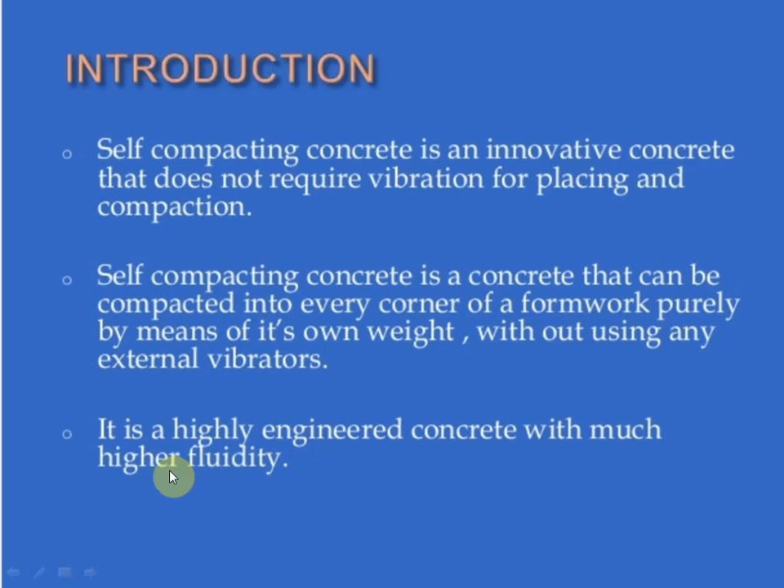It is a highly engineered concrete with much higher fluidity. The fluidity is more in this, that's why it will reach each and every corner of formwork, and it will get compacted by itself by its own weight. So that is the main thing, because of the higher fluidity.

Next, materials required for self-compacting concrete are cement, fine aggregate, coarse aggregate, water, chemical admixture. The main ingredient which gives the self-compacting property is VMA. Plasticizers, and VMA is nothing but viscosity modifying agent, and air entraining agents. So viscosity modifying agents, called VMA, and air entraining agents, that is AEA. These are the main ingredients for the self-compacting property.

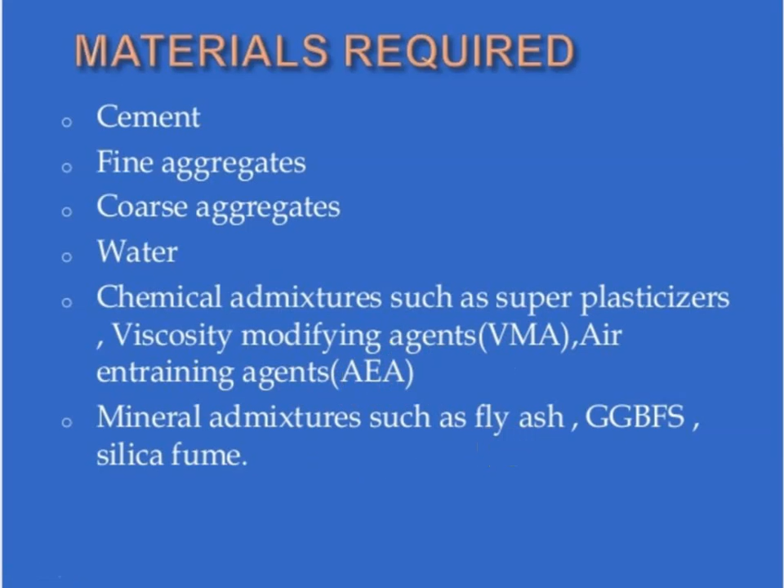Mineral admixtures are also used, like fly ash, GGBFS, and silica fume. GGBS is nothing but ground granulated blast furnace slag. For cement you can use 43 or 53 grade, and well graded cubical or rounded aggregates can be used. Water quality is maintained the same as reinforced concrete, that is potable water should be used.

Chemical admixtures, like I have told, superplasticizers, particularly polycarboxylate ethers, are used in SCC; VMA and AEA are also used. For mineral admixtures you can go for fly ash, which improves the quality and durability of concrete. GGBFS, also called GGBS, ground granulated blast furnace slag, will improve the rheological property of concrete, that is the semi-solid and liquid state. And silica fume will improve the mechanical property of concrete.

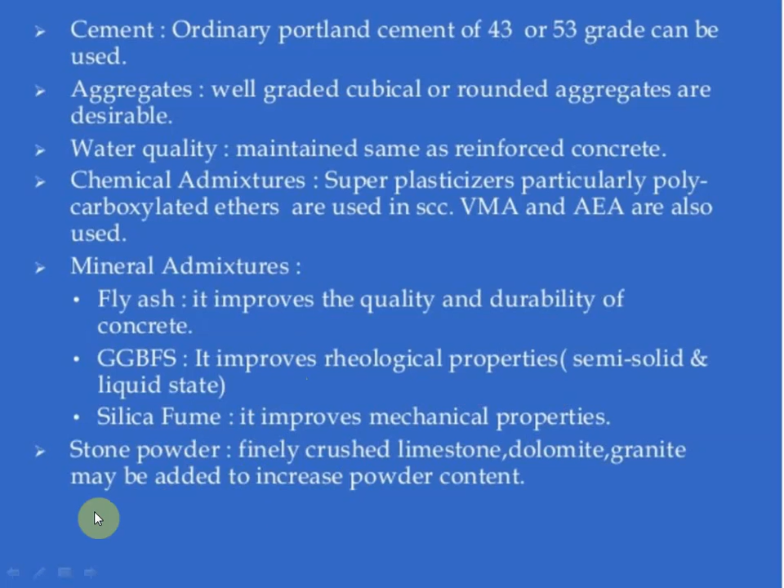Even stone powder is used in this concrete, that is finely crushed limestone. Dolomite, granite may be added to increase the powder content. As compared to normal concrete, SCC has more water content. In normal concrete the water percent is 18%, here it is 20%. One more thing, coarse aggregate in normal concrete is 46%, but in SCC it is 28%. That is, coarse aggregate is used much less as compared to normal concrete.

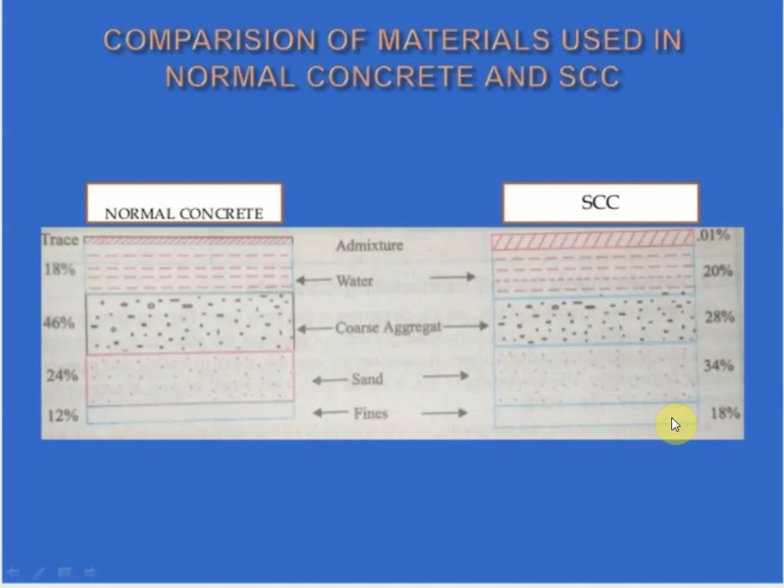In normal concrete sand is 24%, whereas in SCC sand is 34%. Here more sand is used to get that fluidity, so the paste is more in SCC. Fines are 12% in normal concrete and 18% in SCC. So, properties of SCC, that is self-compacting concrete.

In the fresh state, it has very good filling ability. As I told, it flows easily at a certain speed, by its own weight, into the formwork. That's why it doesn't need any vibrators. And passing ability: it passes through reinforcement, such as in slabs, easily without blocking.

Segregation resistance is one of the best properties of SCC, because one more quality of SCC is fluidity, and with fluidity there are chances of segregation, but it is a segregation resistant concrete. The distribution of aggregate particles remains homogeneous in both vertical and horizontal directions, because when you add more water there are chances of segregation. But here the particles remain a homogeneous material in both directions, whether in columns, beams or slabs.

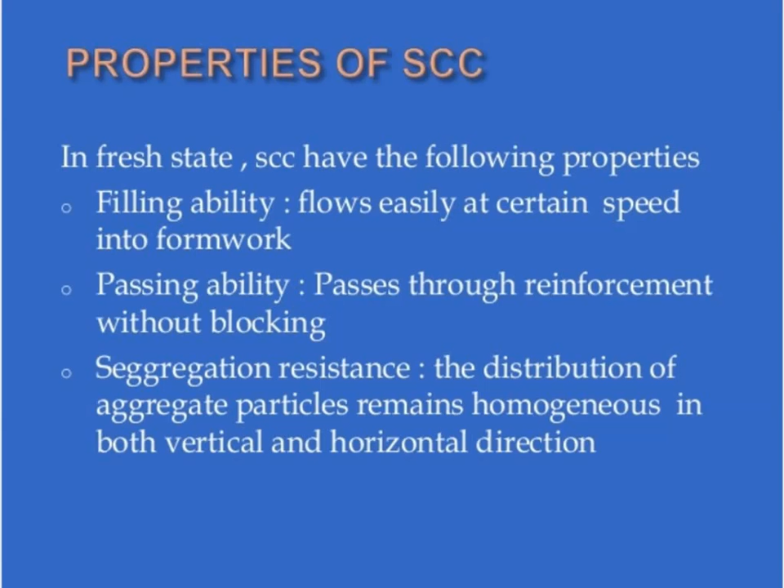Production and placing of SCC. The material proportions used for this concrete are taken by volume rather than by mass. Mixing should be done for a longer time when compared to conventional concrete. Here mixing should be done for longer time in SCC.

For placing, some rules should be followed: the limit of vertical fall distance is 5 meters. You should not drop the concrete from more than 5 meters, each layer should be at a height of 500 mm, and horizontal flow should not exceed 10 meters, to get better self-compaction. Next, curing. Early curing is necessary for SCC.

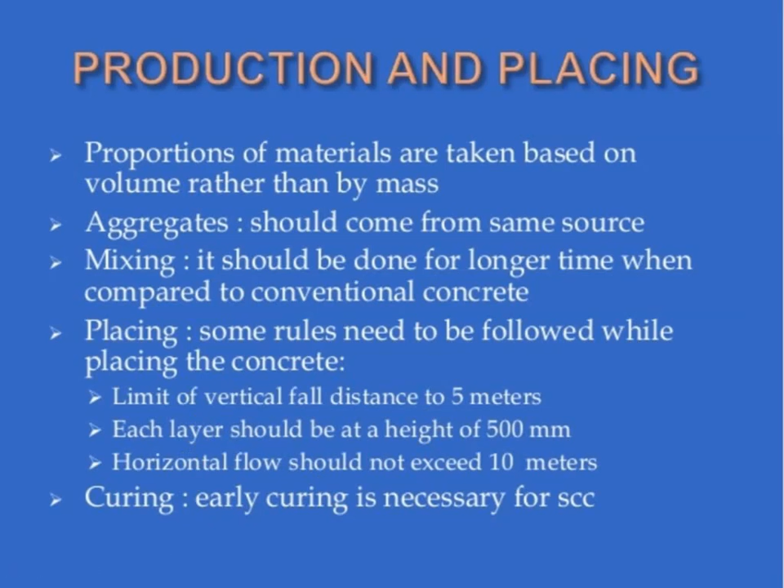There are some mix design principles we have to follow for SCC: the flowability and viscosity of paste can be controlled by proper proportioning of the water-powder ratio, and then by adding superplasticizers and VMA. As I told in the beginning, VMA is the main ingredient here, along with superplasticizers. And the paste is the vehicle for the transport of the aggregate. As I told, the paste will be more in this concrete.

That's why they'll use stone dust or any other type of stone dust to get that paste. So therefore the volume of the paste must be greater than the void volume in the aggregate. In aggregate content, the volume of paste should be more than the voids; voids are nothing but pores.

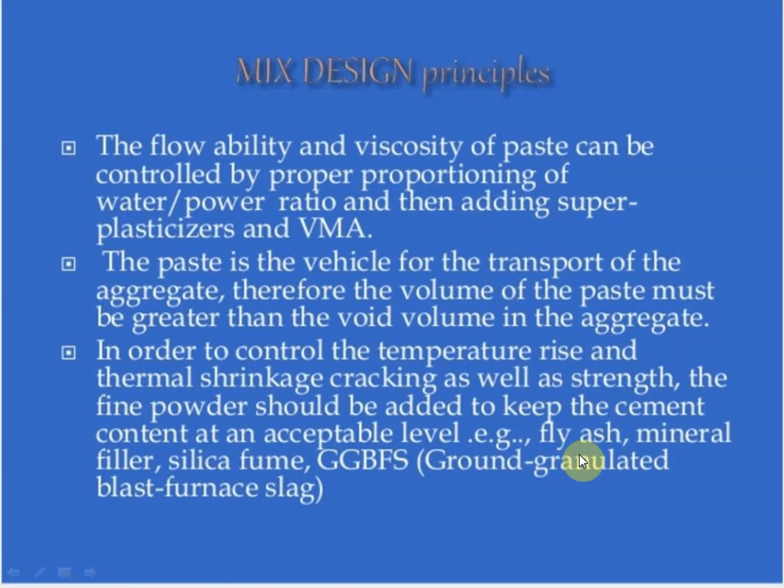In order to control the temperature rise and thermal shrinkage cracking as well as strength, the fine powder should be added to keep the cement content at an acceptable level. That is, to control the temperature rise and thermal shrinkage cracking, because due to shrinkage cracks will appear, and also to maintain the strength, the fine powder should be added. For example, you can use fly ash, mineral filler, silica fume, GGBS for that.

And in mix design, the sequence should be followed. First they have to determine the desired air content, determine the coarse aggregate volume, then sand content, paste composition, and determine the optimum volumetric water-powder ratio and superplasticizer dosage in mortar, because these are the ingredients which make the concrete self-compacting, that is paste and superplasticizers. So you have to go for calculation of that.

In SCC the air content is taken as 2% for the calculation. And as I showed in the beginning, compared to conventional concrete, in SCC the volume of coarse aggregate is very less, so it should have low coarse aggregate content and increased paste content, which will give the high fluidity for the SCC. So that's why you should have the increased paste content and low water-powder ratio.

Low water-powder ratio, because if water is more, then segregation will happen, and again you have to use more segregation resistance materials. So next, increase the superplasticizer dosage. To get that self-compacting property, you have to have the increased superplasticizer dosage.

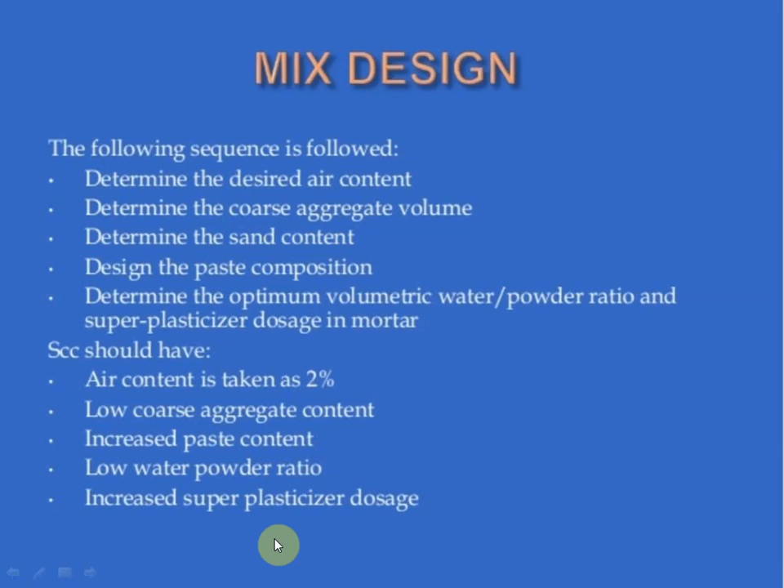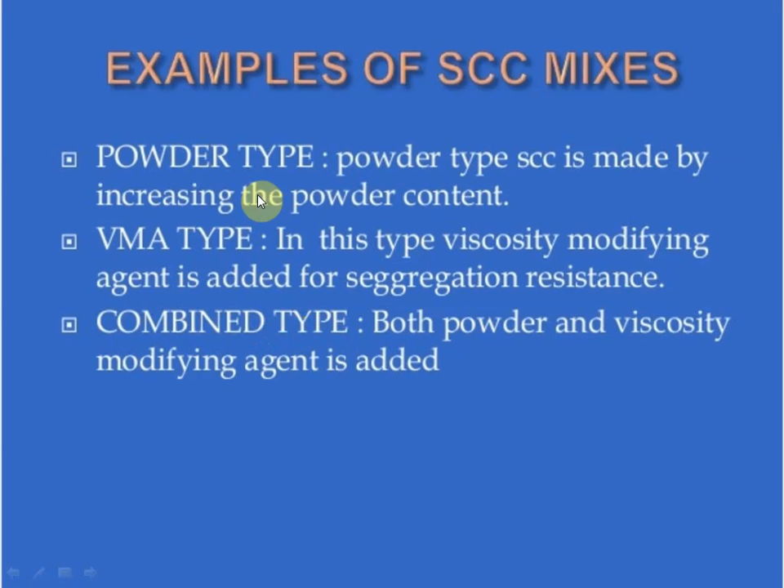So the examples of SCC mixes: there are three types of self-compacting concrete that can be used. One is powder type. In this the SCC is made by increasing the powder content. Next is VMA type, that is viscosity modifying agent. This VMA is added for the segregation resistance. And next is combined, that is both: you can use powder type and VMA agent is added.

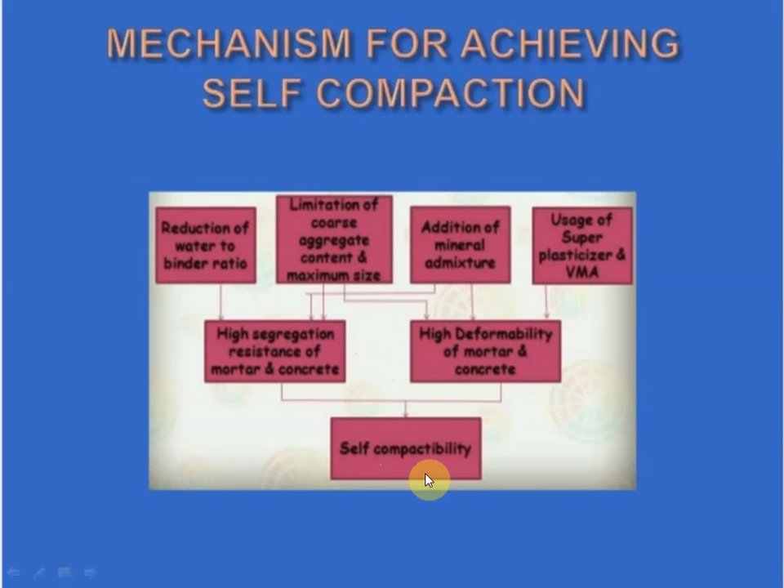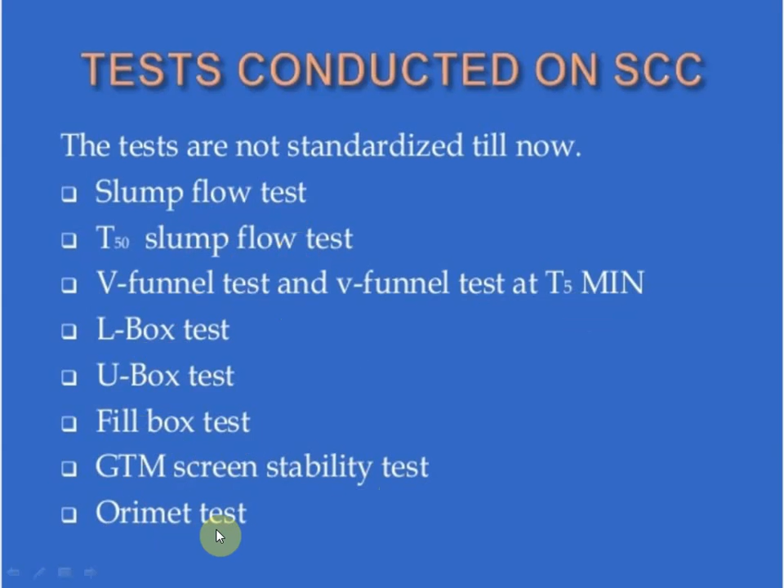So there are many tests which are conducted on SCC in a fresh state, that is slump flow test, T50 slump flow test, V funnel test, and V funnel at T5 minutes, L box test, U box test, fill box test, GTM screen stability test, and Orimet test. These are some of the tests which are conducted on SCC.

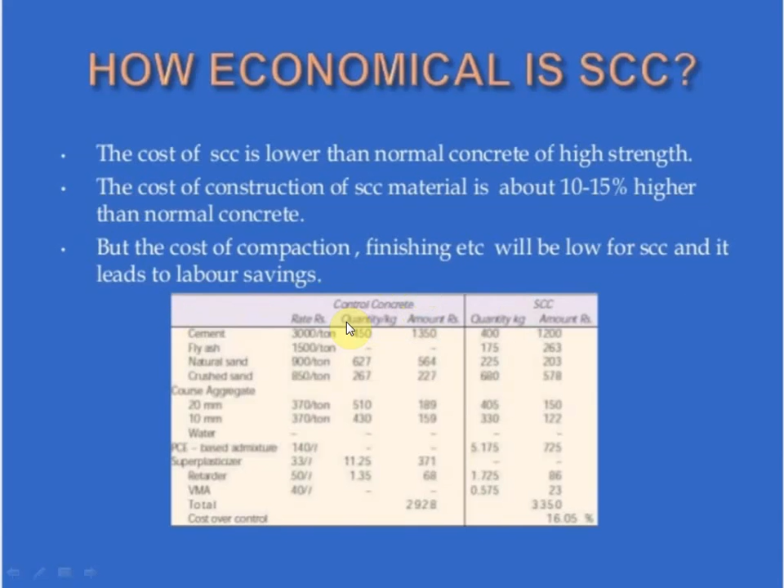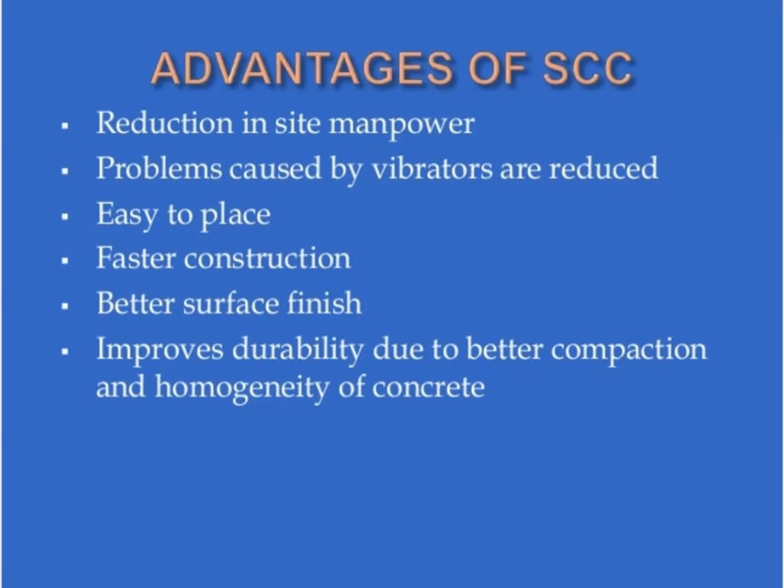So the advantages of SCC are reduction in site manpower, problems caused by vibrators are reduced as this is self-compacting, easy to place because it can easily reach every corner of formwork, faster construction, better surface finish, and it will improve the durability due to better compaction and homogeneity of the concrete.

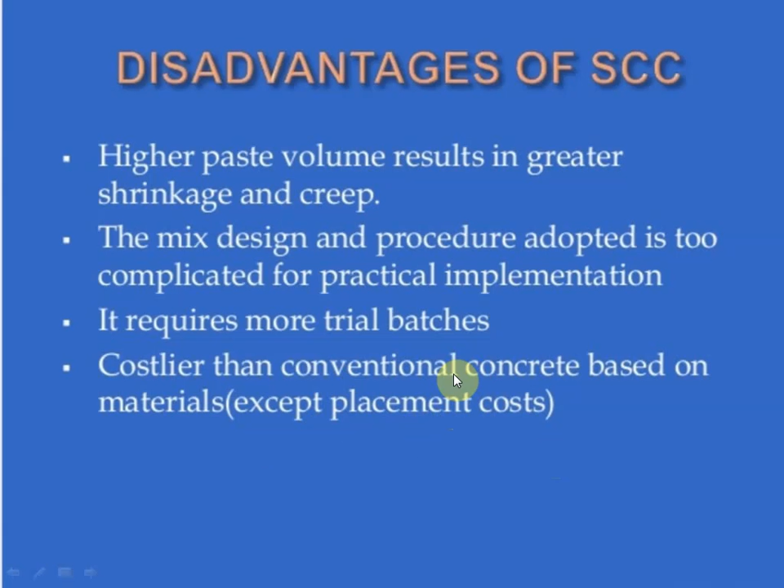It requires more trial batches, because to get the required strength and the self-compacting property, it requires trials. And it is costlier than conventional concrete based on the materials, except placement cost; when compared to only materials, it will be costlier than conventional concrete. So this is about SCC, that is self-compacting concrete.